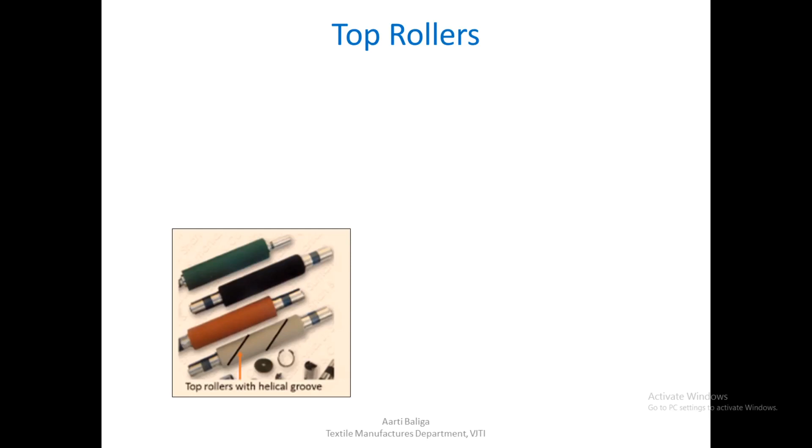Let us learn about this in a little detail. Top rollers are covered with synthetic rubber coating. The coating may be hard or soft. These rollers, as mentioned before, are not positively driven, so they run or rotate because of the frictional contact they have with the bottom rollers, which are positively driven.

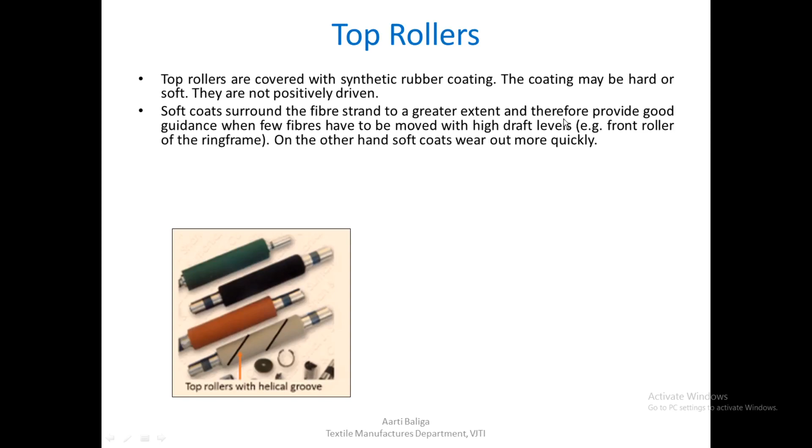Soft coats surround the fiber strand to a greater extent. This diagram we'll see in the next slide. They tend to provide greater guidance by surrounding the entire fiber strand, and especially when few fibers have to be drafted, this becomes more important, and it becomes very important at a stage like on the front roller of the ring frame.

But the amount of advantage that these soft coats give, it also has a disadvantage that they wear out very quickly and would probably require a more frequent change.

Hardness is specified in degrees Shore, which is a unit of measurement. We just saw that there are helical grooves on the top roller surface. The reason for them being there is that they are helpful in transporting dust particles to the suction unit.

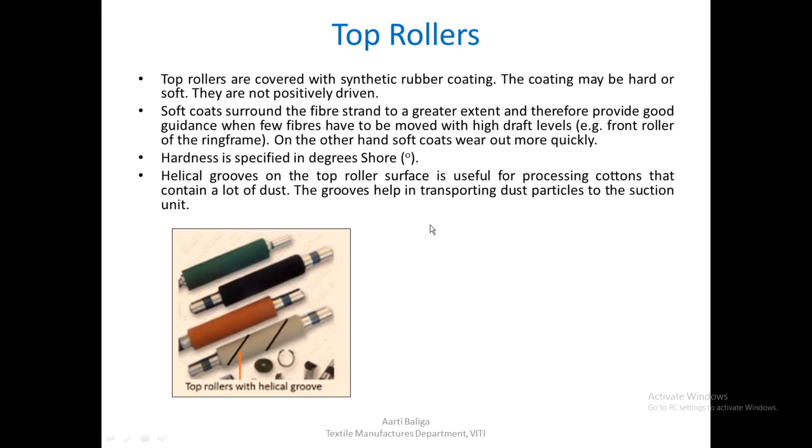So degrees hardness, or degree Shore, are classified like this. If it's a soft type of cot, it would be between 65 to 75. If it is medium, the number would be 75 to 80, and a hard cot would be above 80.

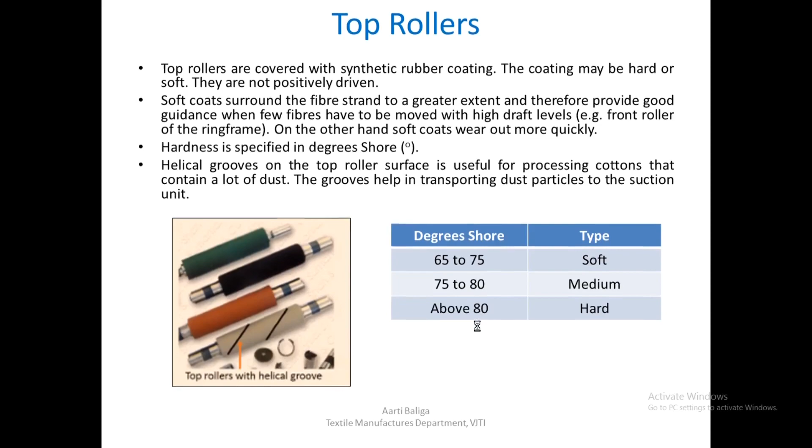Let us see how this Shore hardness is measured. A durometer is the instrument used for measurement of Shore hardness. The video I'm going to show you now covers a whole range of materials, from very soft gel-like material to very hard plastic. It will clarify the entire range of materials and how they are measured, and the type of scales used to measure the hardness of any kind of material we come across. So let us take a look at this.

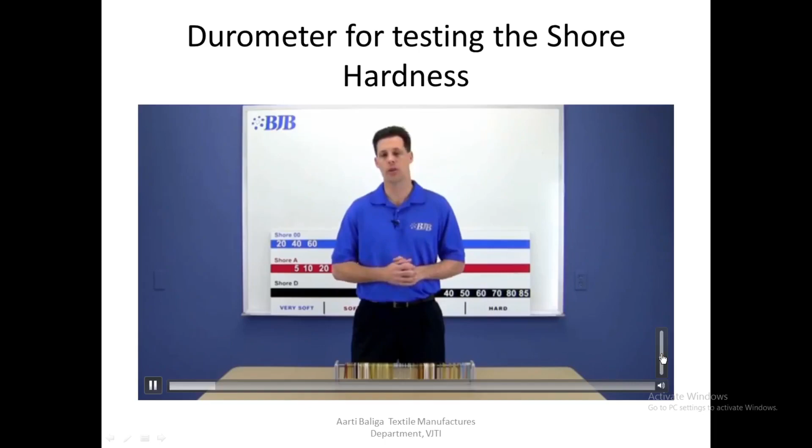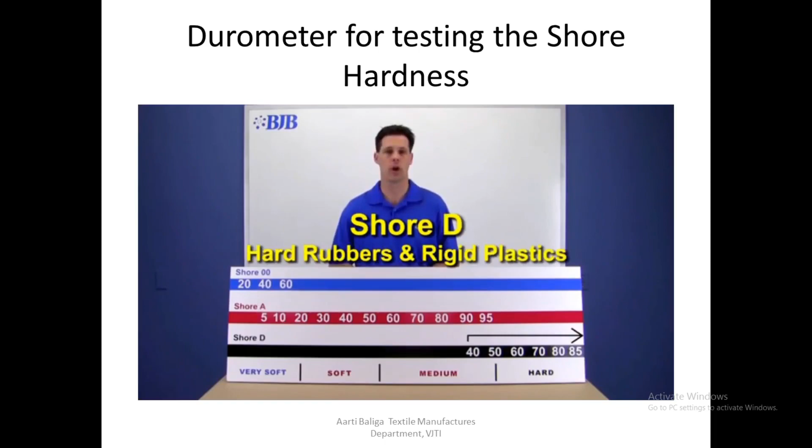Welcome back to another Tech Tip video from BJB. BJB manufactures a wide variety of plastic products, and navigating through them takes a basic understanding of the characteristics that differentiate them. One of the main features we use to do that is durometer, quite simply, how hard the product is. We use two main Shore hardness scales, Shore A and Shore D. Shore A is used on softer, more flexible elastomers, and the Shore D scale is used for hard rubbers up to rigid plastics. We also occasionally use the double-aught scale for extremely soft products like gels and anything extra squishy.

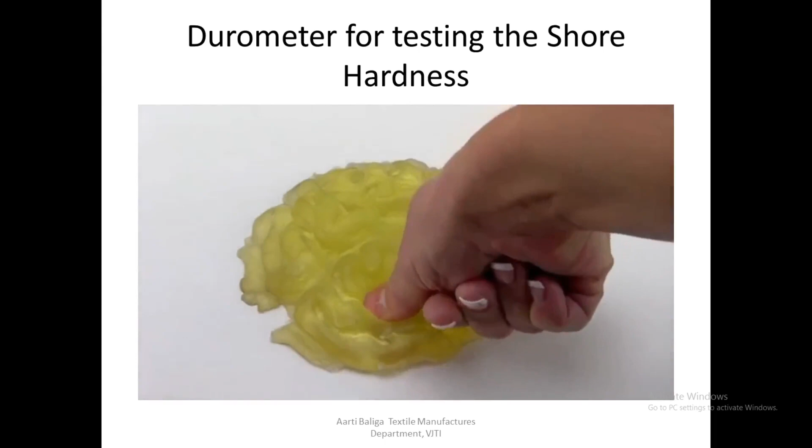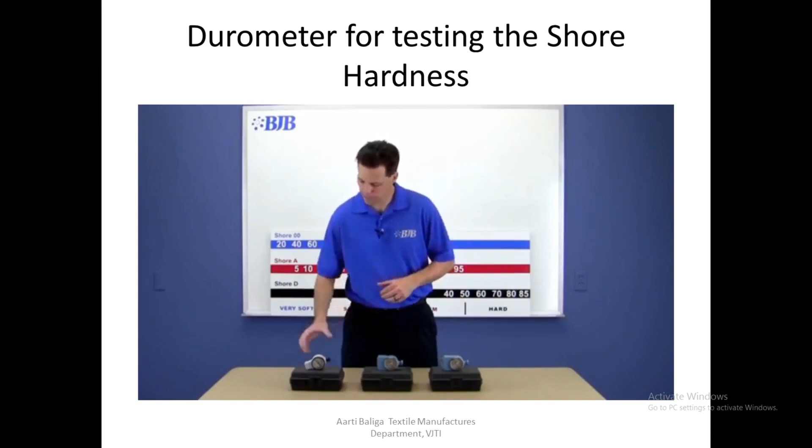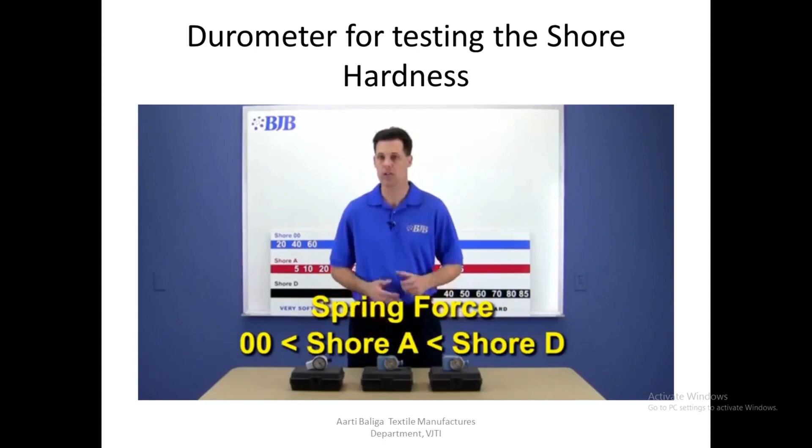Each scale ranges in value from 0 to 100. The higher the number, the harder the product is on that scale. The confusing thing about the different scales for many people is that the scales overlap. The best way to make sense of all this is to visually look at the scales and discuss the actual durometer measuring gauges. The gauges themselves have a couple of important differences. The spring force gets progressively higher as you go from the double-aught gauge, the Shore A gauge, and onto the Shore D gauge. Also, the point on the presser foot gets progressively sharper as you go from double-aught, Shore A, and onto the Shore D gauge.

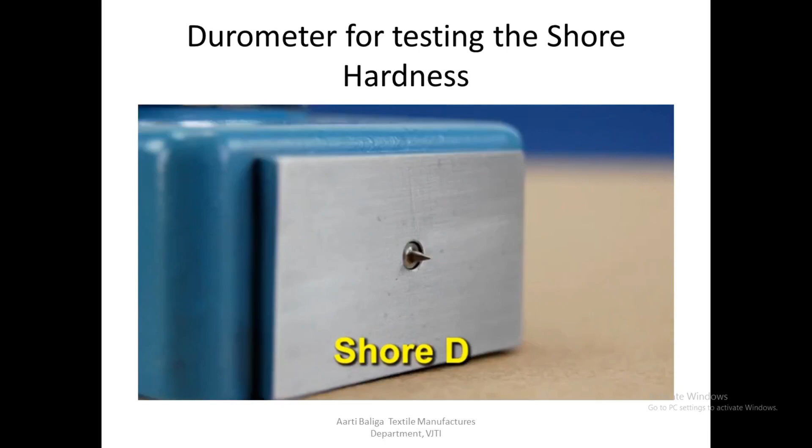So now we can explain why we pick a spot on the overlapping scales to end one Shore type and begin a new one. For example, the sharper point on the Shore D durometer would pierce the surface of many soft elastomers and give us false readings. This is why we end the Shore A product line at 95A and continue on in the D scale. We wouldn't refer to a product being a 20 or 30 Shore D for exactly this reason. Having said that, we do have to note that a 90 Shore A product also measures to approximately a 40 Shore D, and a 95A to a 45D.

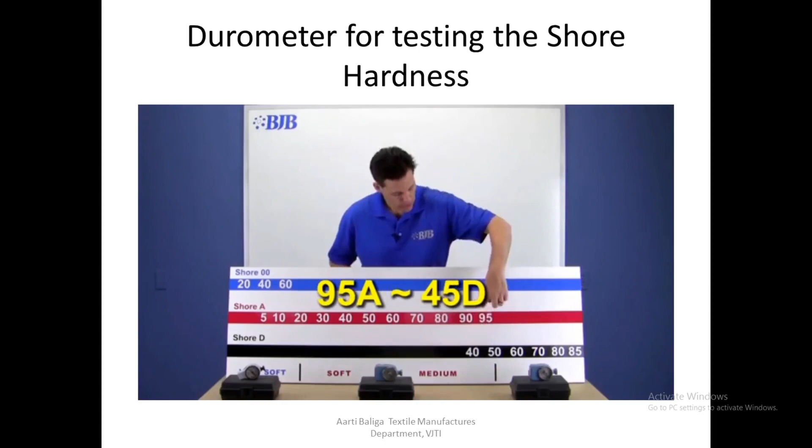It can be a bit of a gray area. One is not right, and one is not necessarily wrong. In this case, we would look at a few other properties of a material to determine whether to put them in a Shore A or Shore D category, like elongation or tear strength.

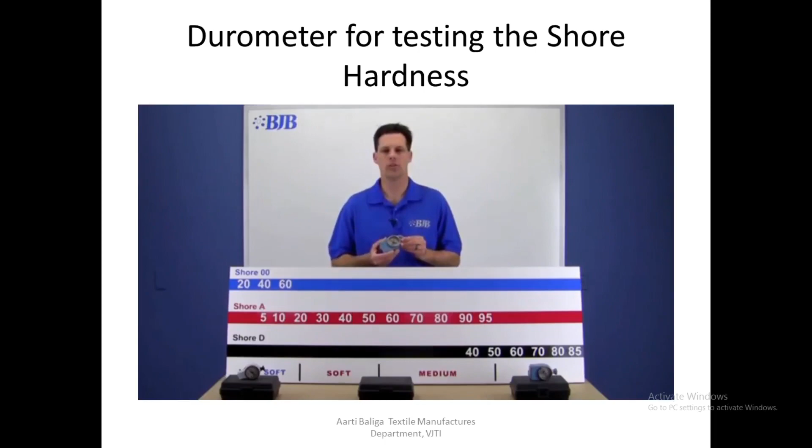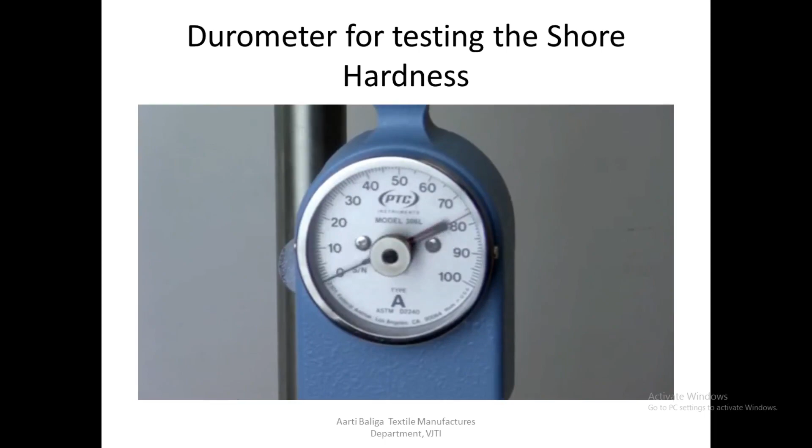If you do happen to have a set of durometer gauges, you should know that accurate readings are taken on samples with a minimum thickness of 1/4 inch parallel to the surface, and readings are taken within 1 second of pressing down. Many gauges have an extra red dial that records the highest reading, so that can take out some of the guesswork. More info on durometer can be found on Wikipedia, and test methods are available through ASTM on their website.

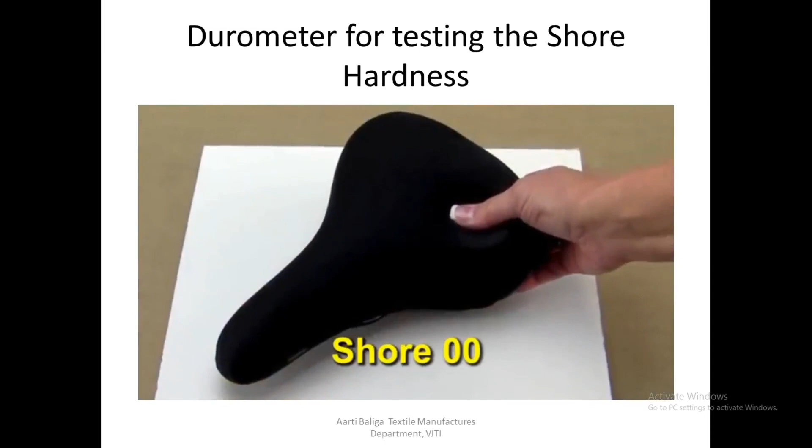Let's examine some common objects that might relate durometer to something a little easier to understand. At the lower end of our board, we have the double-aught scale. Objects found here would be gel bike seats, gel shoe inserts, or chewing gum. Moving up a little bit into our lower Shore A scale, we have something that most of us can relate to, our skin. Now, depending on where you take the measurement... yikes, wrong gauge, that's the Shore D scale.

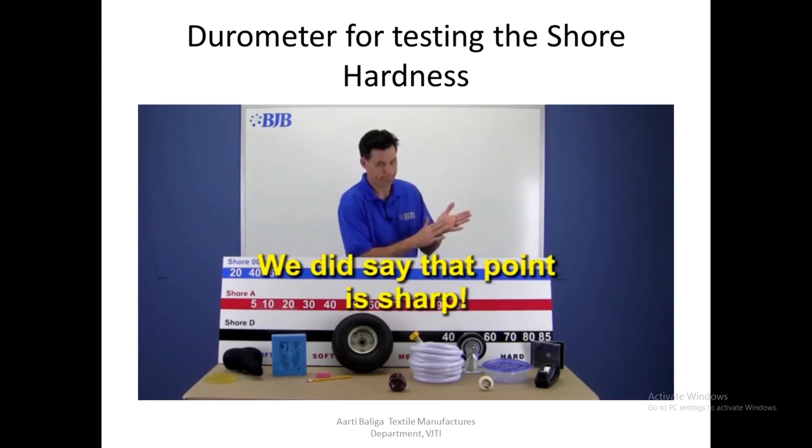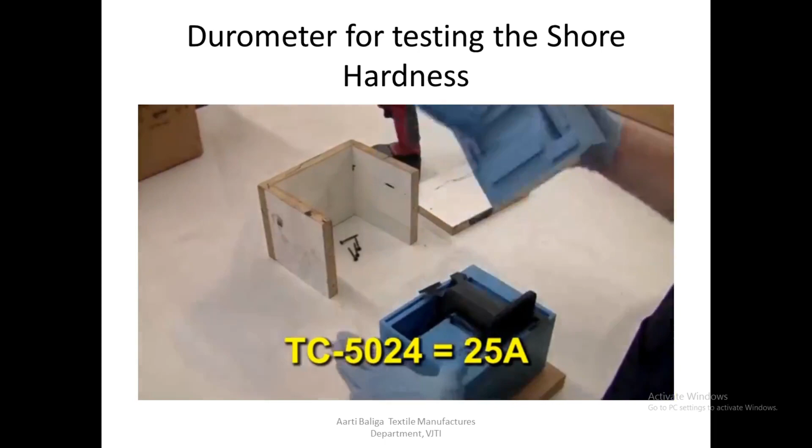Depending on where you place the durometer, you'll probably come up with a number somewhere between about a 5 and 15 Shore A. One of our softer silicone mold materials, TC5024, is a 25 Shore A. This allows easy removal of parts with undercuts or extreme detail.

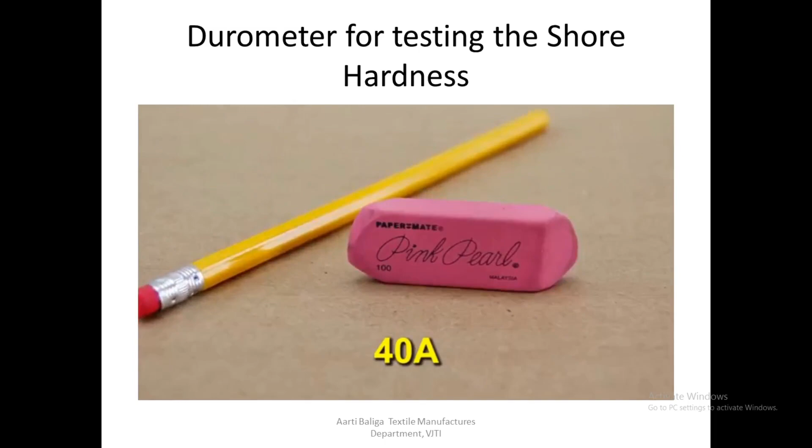A common pencil eraser comes in around 40A. Automobile tires range from about 60 to 70 Shore A. This range is actually one of our most popular durometers for flexible polyurethanes.

Going up a little higher, we have a urethane skateboard wheel at 83A. This is your softer, longboard cruising style wheel. A hard vinyl garden hose measures about 90A.

And then we start crossing over scales to roughly a 40 Shore D, which is in line with the hardness of a typical caster or shopping cart wheel.

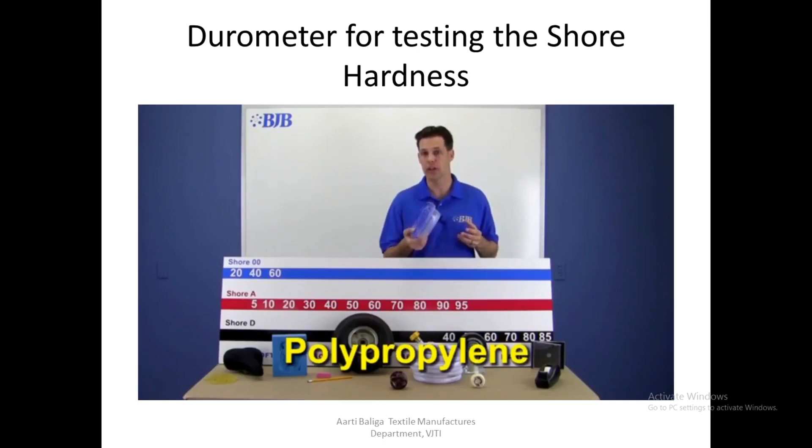This harder ramp style skateboard wheel, meant for smooth surfaces, measures in at 53D. Injection molded plastics we're familiar with, like polypropylene plastic food containers or high density polyethylene, can vary from about a 60 to 70 Shore D. These are hard, tough, very high impact plastics that still exhibit a little bit of flex.

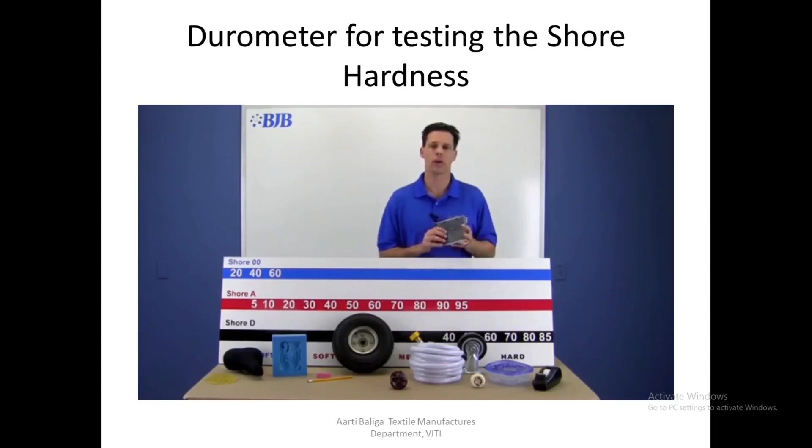ABS plastic ranges from about 75 to 82 Shore D. This rigid plastic is all around us in various forms of consumer products. And at the upper part of our board, at 85D, are very hard plastics like this CD case. Other hard plastics in this range are acetal Delrin, nylon, and epoxies, just to name a few.

As I said before, BJB manufactures an extremely wide variety of products, spanning these shore hardness ranges, all liquid, castable systems you can mold for a variety of part requirements.

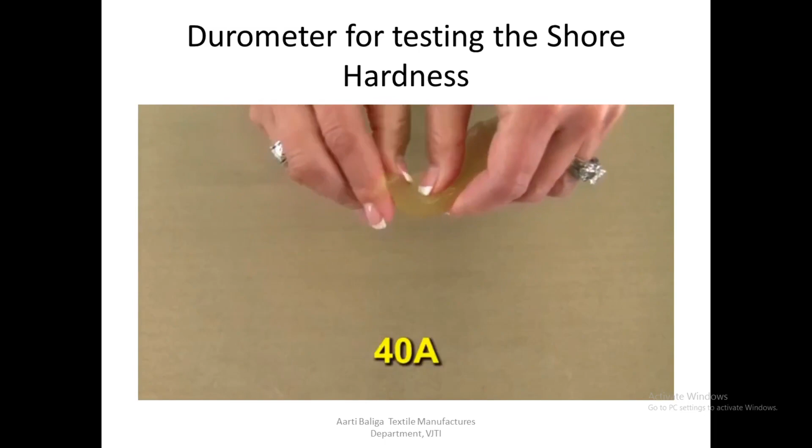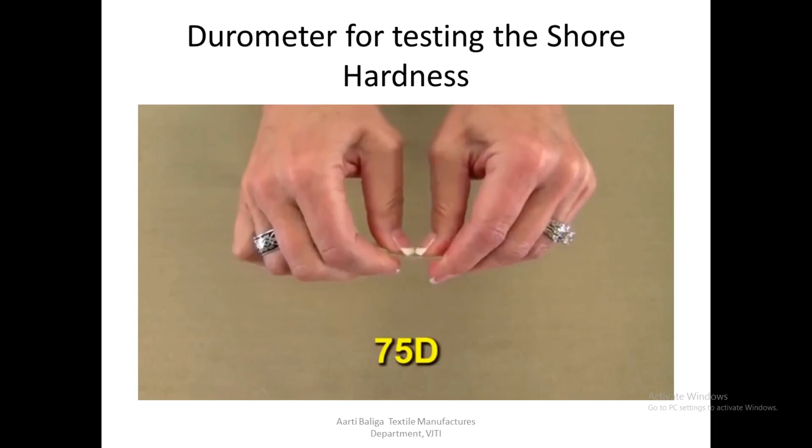I'll leave you with one last thought about durometer and part thickness. Using these step samples, we can see how a flexible material might feel different in thinner sections versus thicker sections. The same goes for rigid materials. Something in a thicker section will feel extremely stiff, but in a thinner section might surprise you how much you can flex it. So keep this in mind when designing around your part's geometry and wall thickness.

Well, that's it for now.

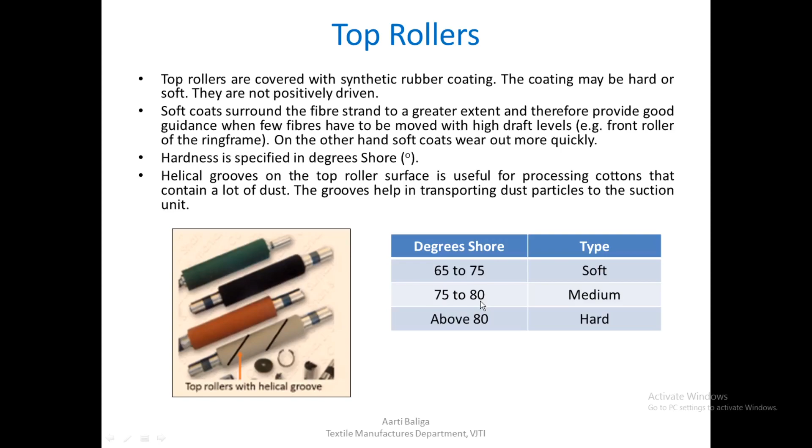Okay, so we have seen how the softness or hardness of the cots are measured, and now we have a fair idea of this particular shore hardness, shown here as 65 to 75, 75 to 80, and which category it will fall into. So coming back to our next slide, let us see what is the relation between grip, friction field, and the softness of the cot that we have just studied.

What we see is we already have learned that the better the grip, the better is the spread of the friction field into the drafting zone. This is what we have known from our earlier lectures, which also leads to better guidance. So that means I should go for a better grip, which will lead to better guidance.

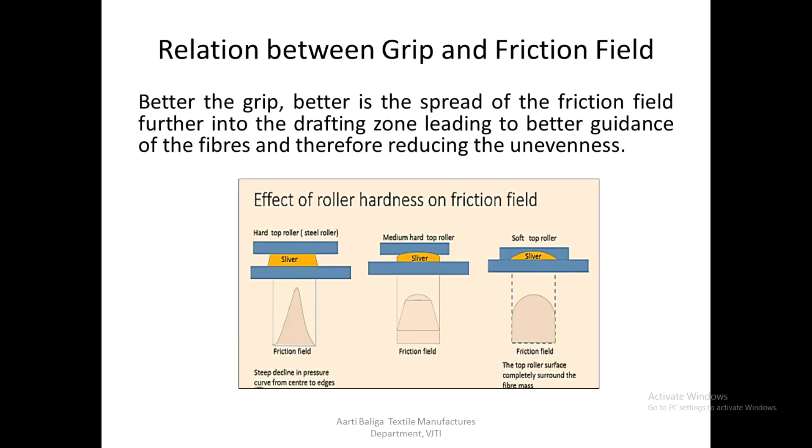So this is how the relation goes between the grip provided by the soft top roller and the friction field, and consequently the guidance of the fibers.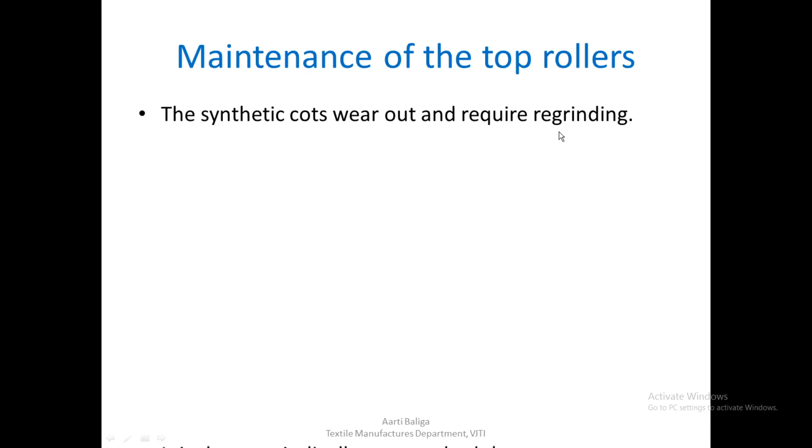So we come to the topic of maintenance of the top cots or top rollers. The top rollers require maintenance because as they run, whether they are slightly harder or soft cots, they will eventually wear out, and when they wear out, they leave grooves in the top roller because of the sliver running continuously between the roller pairs. So there is maintenance needed, done by a process called regrinding, with a periodic schedule for this.

What we use are discs or rollers that remove material from the surface, removing layers in very small amounts, maybe millimeters or below. So a very small amount of layer is removed each time, and every time you take the cot for grinding, the cot thickness reduces, and once it becomes too thin, it loses its cushioning effect, or its ability to surround the fibers and give good guidance.

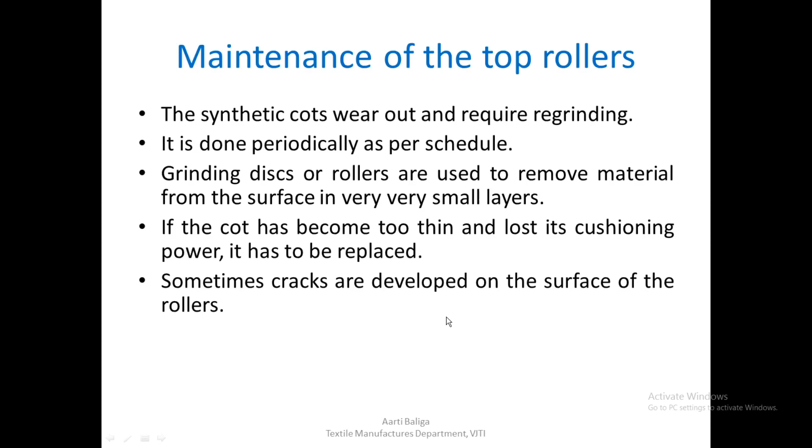After a certain period, when the cot thickness becomes so low that it can no longer provide guidance to the fibers, it needs to be replaced. Sometimes cracks or grooves develop on the surface, and for this reason too we may have to go for regrinding.

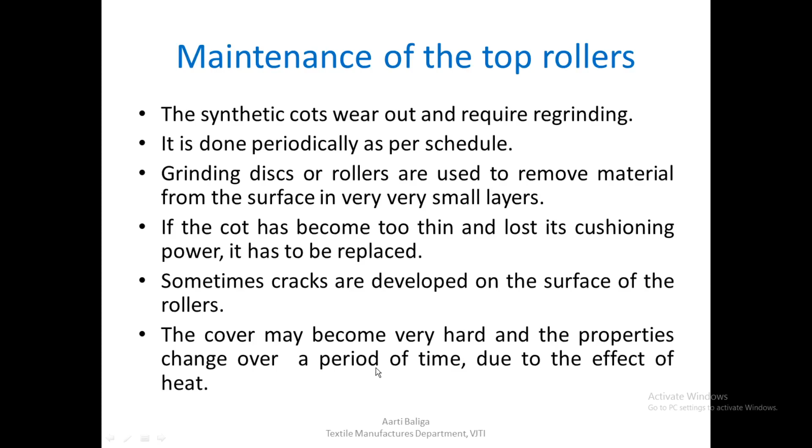As you keep grinding the top roller's synthetic rubber surface, it will keep becoming harder, and the properties of this rubber will keep changing over time. Also, due to the heat generated by friction during drafting, the properties change, and we may need a replacement periodically.

So let us take a look at the cot grinding machine, which will give you an idea of how the grinding takes place.

Okay, so we just saw the grinding of cots.

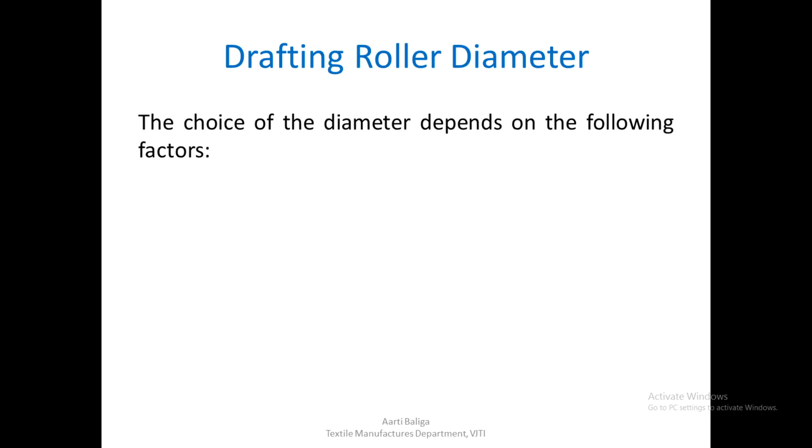So now we come to the next topic, that is drafting roller diameter. In the previous lecture I told you that this diameter also has some theory behind it, on how to choose it and what kind of diameter we need to choose.

The choice depends upon four factors, the first being fiber length. Fiber lengths for the cotton fiber that we need to process range from 22 to 54 mm. While choosing the roller diameter, we must ensure this fiber range is catered to, meaning we can easily process this range without changing the roller diameter, because changing rollers every time the fiber length changes becomes very inconvenient.

The next point to consider is the production rate, and there is some relation between the roller diameter and the production rate, which we will see shortly.

The third point to consider is the incidence of roller lapping. Roller lapping is when fibers tend to stick to the top roller surface and remain there, collecting in the form of a lap on the top roller. This also, to a certain extent, depends on the roller diameter we choose.

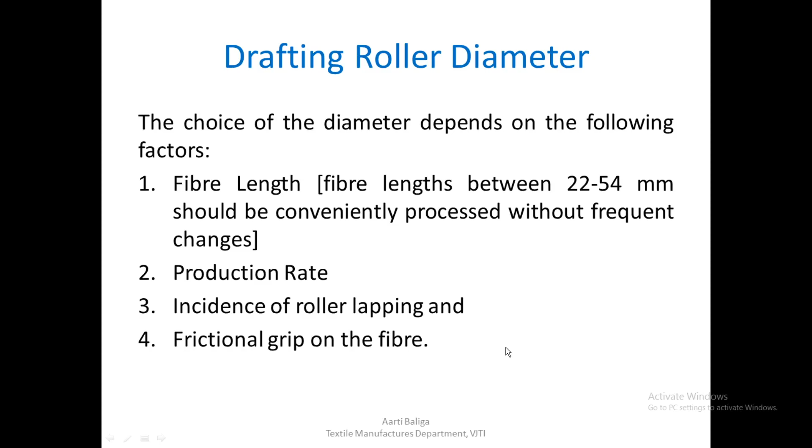The fourth point is the frictional grip on the fiber. The roller diameter plays a role here too in providing the frictional grip on the fiber. So these are the four points which we are going to see in the coming slides, how the roller diameter choice is affected by these four factors.

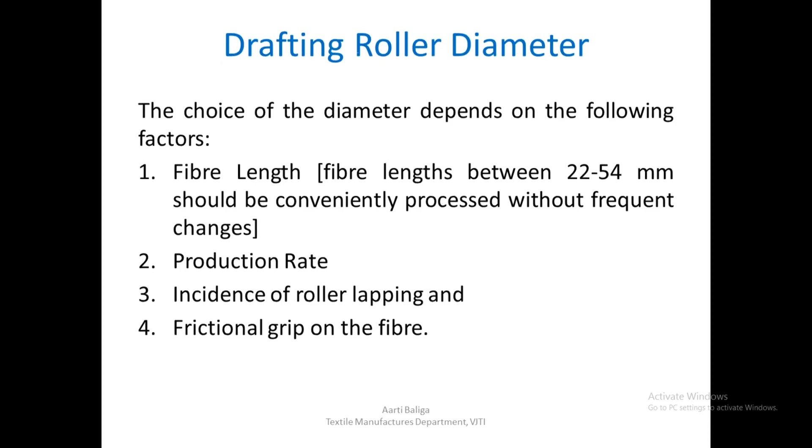So we come to the diameter and fiber length relation. To understand this, we'll have to take some numbers and figures in a table. We know that the nip to nip distance between any two sets of rollers should always be more than the fiber length.

This is a fact and should be followed very strictly, because if we keep the roller nip to nip distance—nip meaning grip—lower than the fiber length, then the fiber will be gripped at both roller nips, and since the output roller runs faster than the input roller, the fiber will break. So we need to ensure that the nip to nip distance is always more than the fiber length.

Another point we should know is that there's a limitation on the fiber length that any set of rollers can process. If you keep a set of rollers too close together, there is a fiber limitation on what it can process. It cannot go beyond the nip to nip distance that this set of rollers can provide.

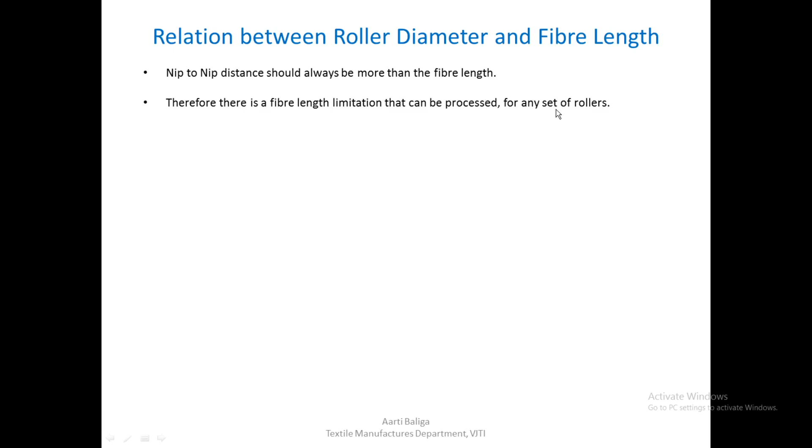For example, you can see this set of rollers here. There are two pairs shown, and this is the nip line or grip line for both these rollers. So this is the nip to nip distance, which is actually equal to Dr, meaning diameter of one roller, assuming both diameters are the same. When you measure from grip to grip, assuming the rollers are just touching, this would be the radius of one roller and this would be the radius of the other roller. Adding them up, the distance between nip to nip equals 2 times r, which is nothing but the diameter of the roller.

So let's put this in a table. Front roller radius I'm assuming to be 20, and the same number for the back roller radius, which is also 20. So the total distance between nip and nip would be 40, same as 2 times the radius of any one roller. The maximum fiber length I can process on this kind of roller setting is therefore 40.

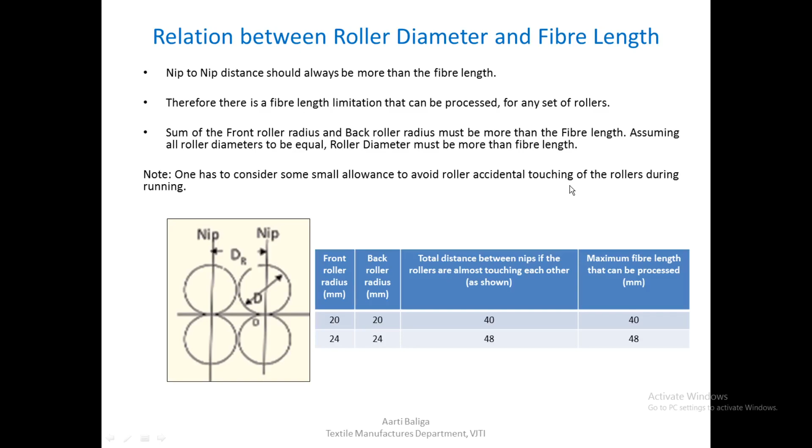So let us understand, if we give this allowance, what would the equation look like? If I keep the pairs of rollers at a distance, the distance from the back roller surface to the front roller surface would be called the allowance. The distance between the nip to nip of the roller would now be: front roller radius plus allowance plus back roller radius. This would be equal to the fiber length I could process on this set of rollers. So whatever allowance I give would be added to the two radii of the front and back rollers, and that sum would equal the fiber length.

If I add this up, assuming the radius of both back and front rollers are the same, it would equal roller diameter plus allowance. So if I reshuffle this equation, roller diameter would equal fiber length minus allowance.

If this is clear, let's take a look at a table which calculates what the roller diameter must be for various fiber lengths. This range has been taken because cotton ranges from 22 to 54, and 54 would be approximately 2 and 1/4 of an inch.

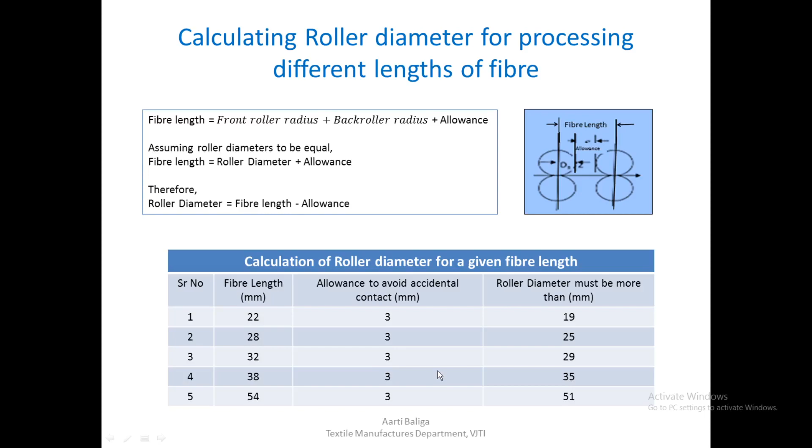So what we can conclude from this discussion is that as I go on changing the fiber length I need to process, I will have to go for a new set of rollers every time. From the table, it is obvious that for processing cotton fibers of different fiber lengths ranging from 22 to 54, we shall need rollers of diameter ranging from 19 to 51, assuming I give a 3 allowance each time. This is not very convenient in the industry.

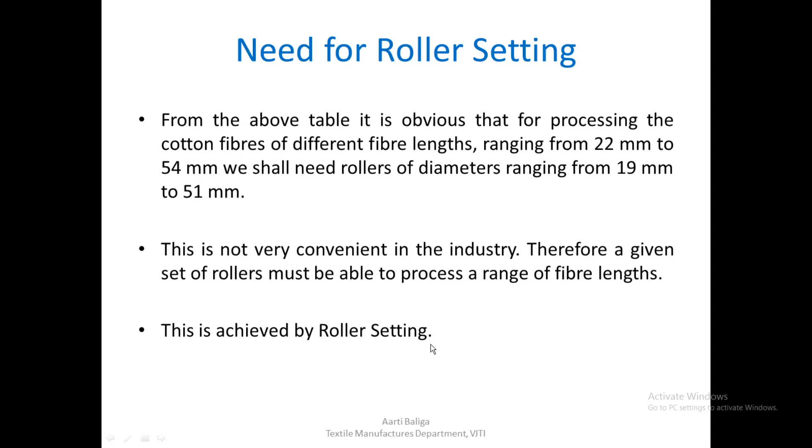Therefore, a given set of rollers must be able to process a range of fiber lengths, and for this I might have to go for something called roller setting. We will discuss this roller setting in one of the lectures later on, how to go about it.

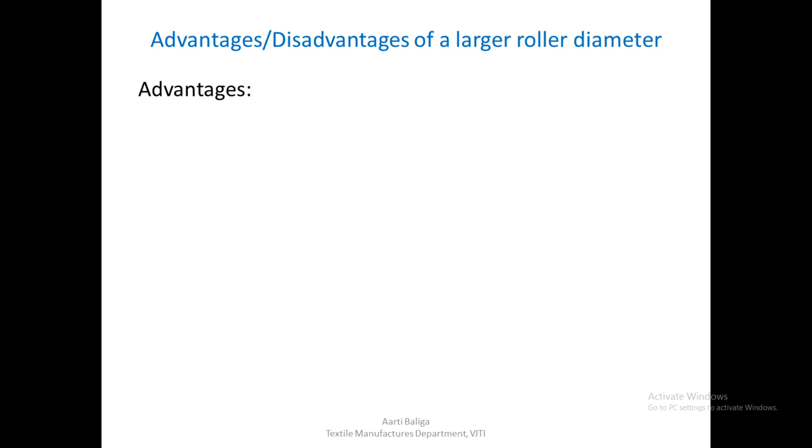So we come to this slide where we see the advantages and disadvantages of a larger roller diameter. When I have a large roller diameter, what advantages does it provide, and what disadvantages do we have to look at? In the previous slide, we said the choice of roller diameter depends on four factors, the first being fiber length, which we just discussed.

Now we look at the relation between roller diameter and the production or surface speed. We already know this formula: surface speed equals pi dn, where n is the RPM of the roller. Therefore, for the same surface speed, if d reduces, n has to increase, and if d increases, n will have to be reduced.

So from the mechanical point of view, a bigger diameter can run at a lower RPM. This is advantageous because if I take a bigger diameter roller, I get to reduce n, and therefore it will exert lesser pressure or thrust on the bearings of the roller. So mechanically, a larger diameter would be advantageous as against a smaller diameter.

Also, a larger diameter roller provides a lower curvature. Since it's large enough, the curvature will be very low, and this is mainly important for the front roller. This has a tendency to reduce roller lapping, a defect where fibers start sticking to the top roller surface, and the machine may get choked up, and we have to stop to remove the lapping, which is not a good sign.

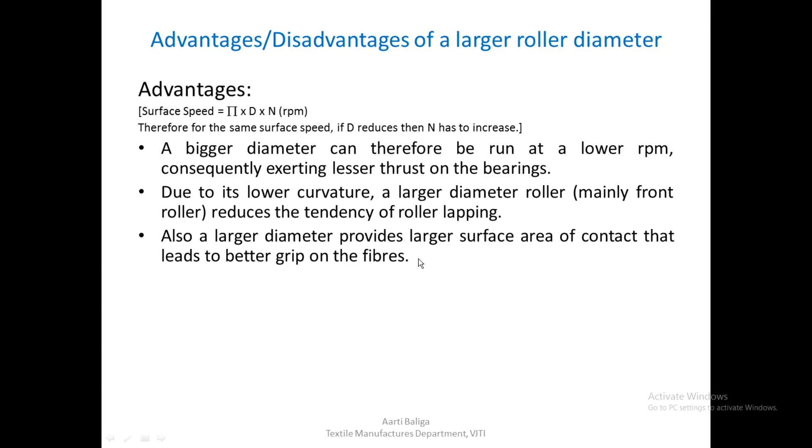But there is one disadvantage: the moment you choose a larger roller, the nip to nip distance will increase, and then we will not be able to process very short fibers, because short fibers will move through the system as floating fibers, which leads to increase in drafting irregularity. So even though increasing the roller diameter lets us process longer fibers easily, shorter fibers do not get as much guidance as they should, and move through the drafting system haphazardly, leading to more thick and thin places and increased drafting irregularity.

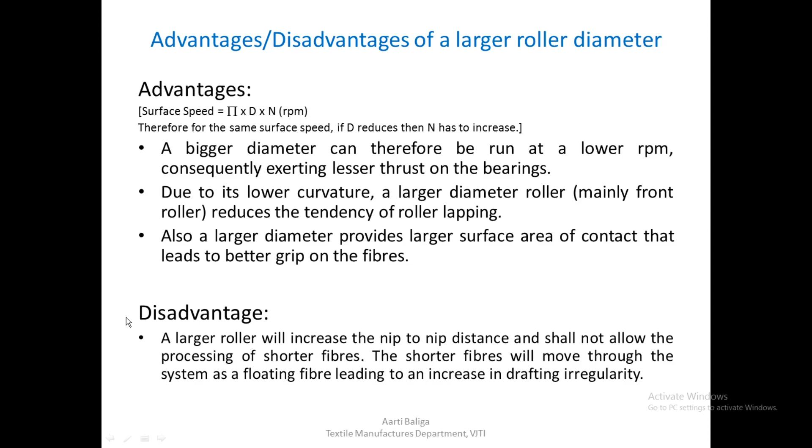So although there are advantages, the larger roller diameter also has this one big disadvantage. The roller diameter choice should always be a balance between these two.